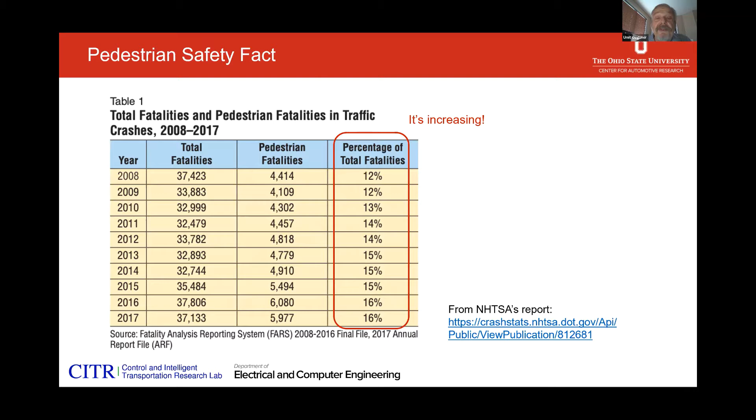I would like to classify a couple of different aspects of the pedestrian vehicle interaction. We're interested in pedestrian crowds and what we call shared spaces, where the vehicle can be moving within the crowd, presumably slowly, with different aspects of the problem there. And then we're interested, of course, in individual pedestrians crossing the street. There are some different issues that come up there, whether it's a straight road or whether we're turning a corner and there happens to be a pedestrian there, and so on.

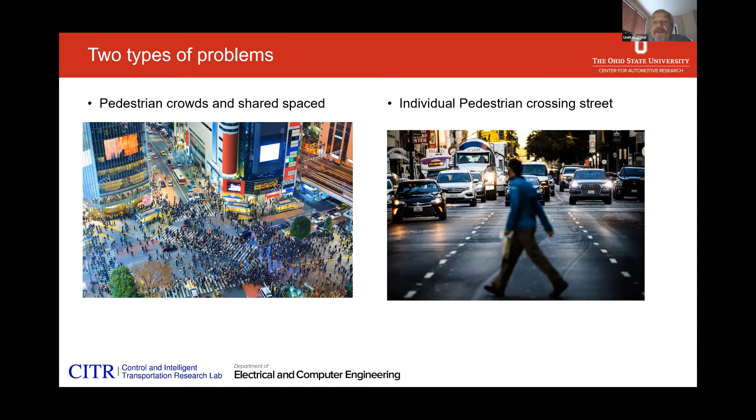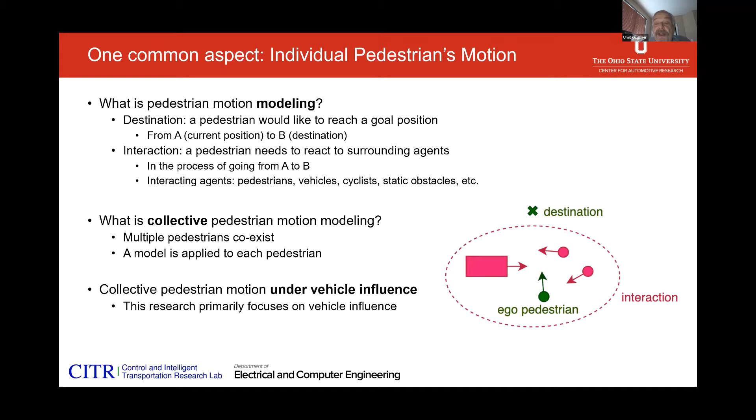In all of this, the common aspect is the individual pedestrian's motion. So we started off even before this UTC having an interest in motion modeling of pedestrians and groups of pedestrians. As you can see from that sketch, we have what we call the ego pedestrian, the one we're really interested in, and possibly other pedestrians also moving around that presumably you don't want to hit, some of whom may be moving with you, and then a vehicle, let's say a car, approaching you. If we are looking at a number of pedestrians, we have to think about the collective pedestrians with multiple pedestrians that coexist, where you have a model applied to each person, and then you also have to model the interactions. When you have a vehicle approaching this group, you have the vehicle influence, and then of course the pedestrians behave differently. So I'll spend some time looking at that specific problem.

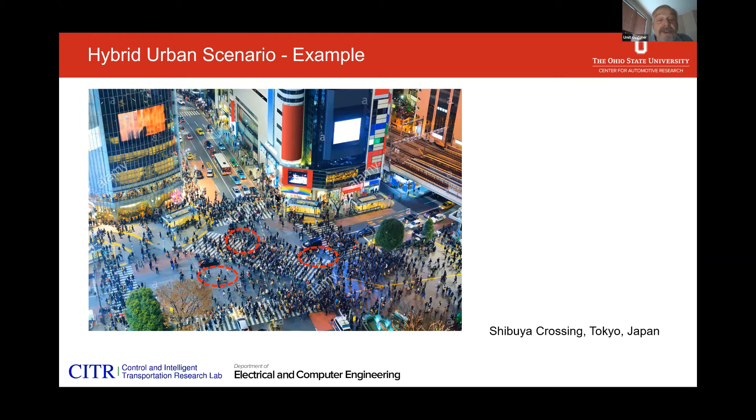I want to show right here where you see a few vehicles that are trying to move within this large crowd. This is somewhat of a different problem, although we're talking about a pedestrian that has somewhat similar, if not exactly the same, dynamic capabilities.

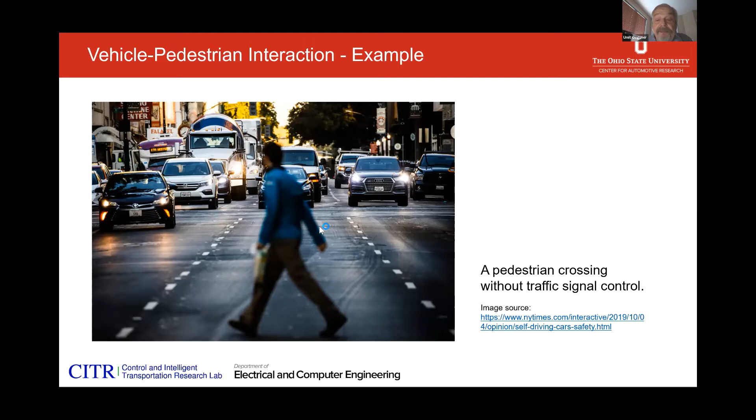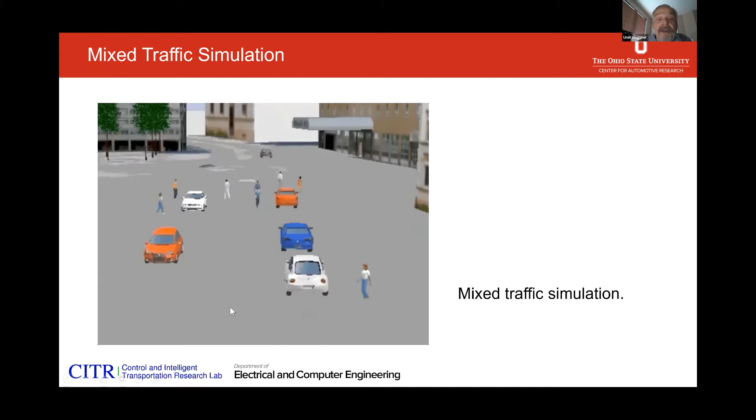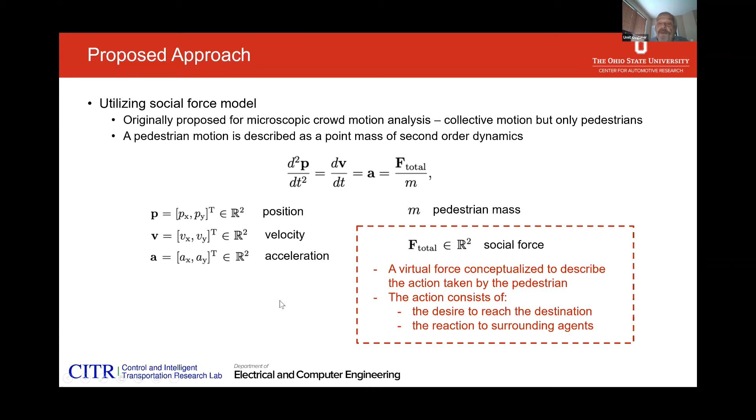There are a whole number of pictures we can bring up in looking at these, and even commercial domain simulation models have been produced, although I'm not sure whether all of this is backed up by real data. So we started getting interested in the mathematical model, and we picked up what's called the social force model, a point mass on the plane type of model, where you're interested in the position, velocity and acceleration of the individual pedestrian moving around. Then you have social forces, a virtual force conceptualized to describe the action taken by the pedestrian, consisting of a desire to reach the destination and a reaction to surrounding agents, which are other pedestrians and, in this case, maybe vehicles.

I'll skip over a lot of this, except to point out that yes, we can put together all the mathematics, but then you don't know whether it fits real pedestrian and crowd behavior in the real world. So we started looking at real data, some of which we generated and some others generated. We were instrumental in generating two data sets.

Due to time constraints I won't try to link to this, but I recommend you look at our two data sets: the CITR data set, directed pedestrians on our Ohio State University campus near our lab, and the DUT data set, done by a postdoc who worked with us and then went back to China, where he collected pedestrian data with vehicles going through them, which we've used a lot. You'll see pictures of it, and you can get to these data sets if you wish.

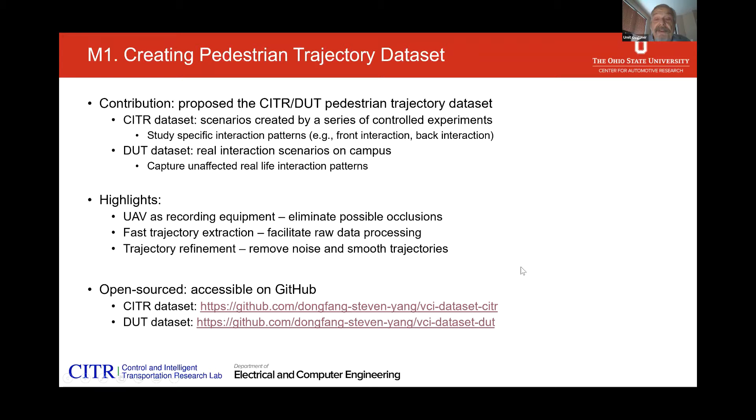So this is our experiment on the OSU campus, where we had a vehicle, an automated golf cart, that went through a number of pedestrian groups walking around and entered their domain.

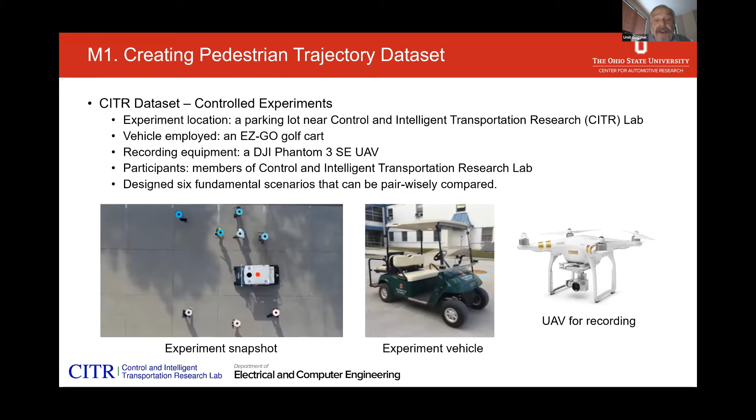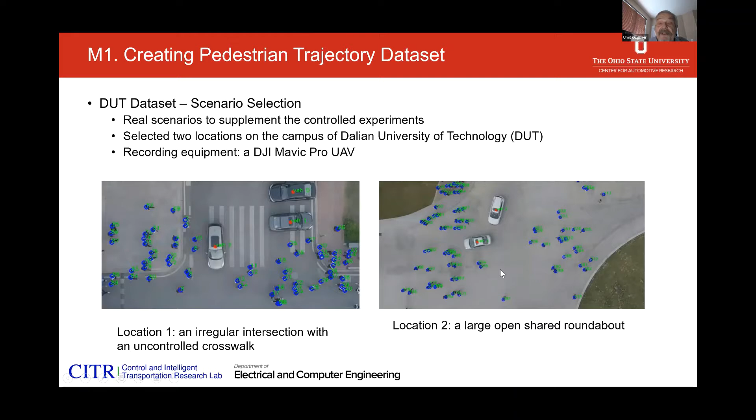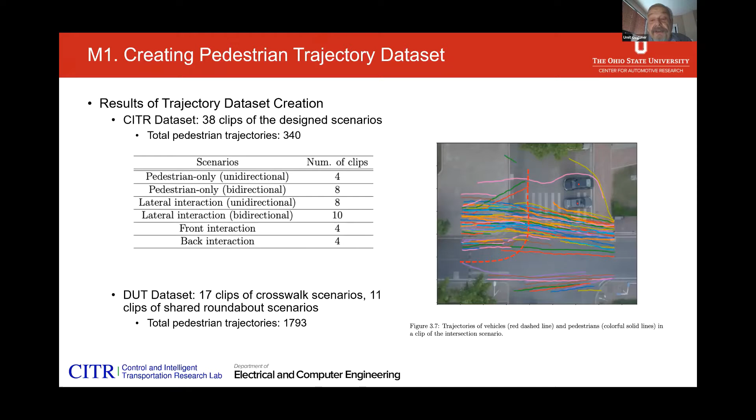And we have created trajectory data sets from what you've seen, and used those in verifying the equations, so that we can now claim that we can model things like this.

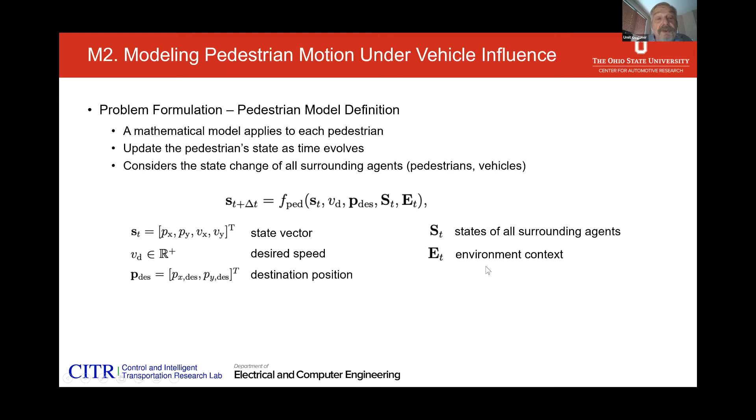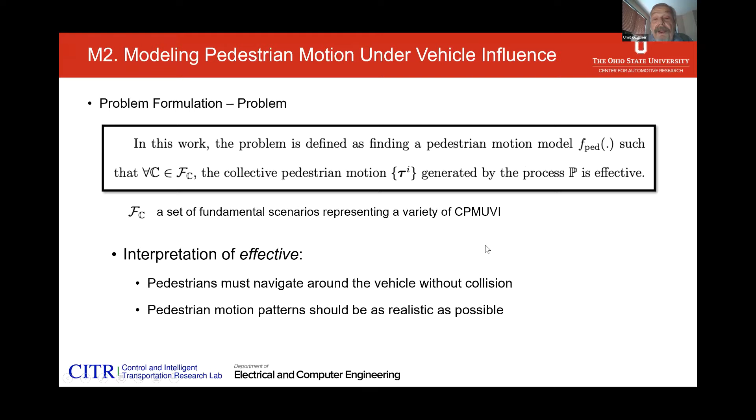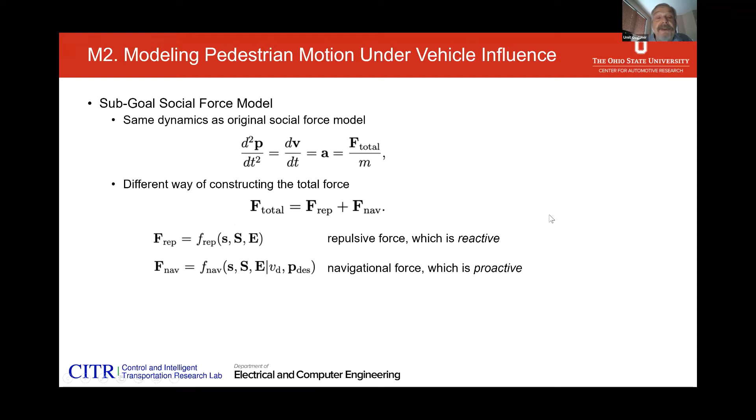I won't go that much into the models and various parameters. Rest assured these do exist and you can read them, the various forces we feel are there: a repulsive force, a navigational force which is proactive, and various effects of these pedestrians moving around. Let me get to the point I want to make, which is the effect of the vehicle.

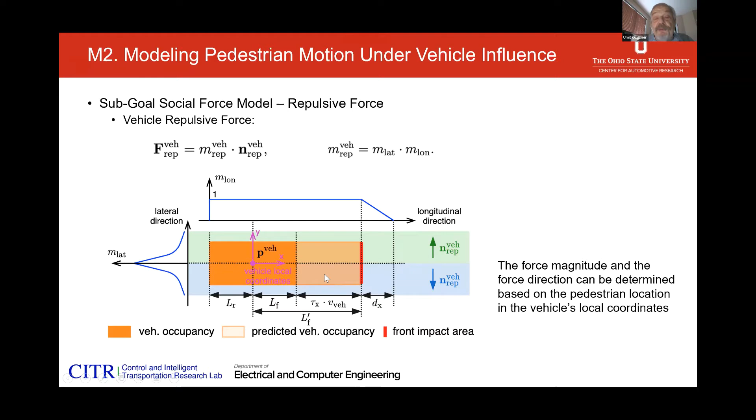We claim there is a repulsive force acting on each individual pedestrian due to an approaching vehicle. Here the approaching vehicle is what you see, the darkest, with its center of gravity marked. The vehicle is moving, and ahead of it is what we predict is a domain it will be occupying, and it has an effect all over the colored region, which gradually diminishes as you go further away. The effect is more in the direction of the perceived or true moving direction of the vehicle.

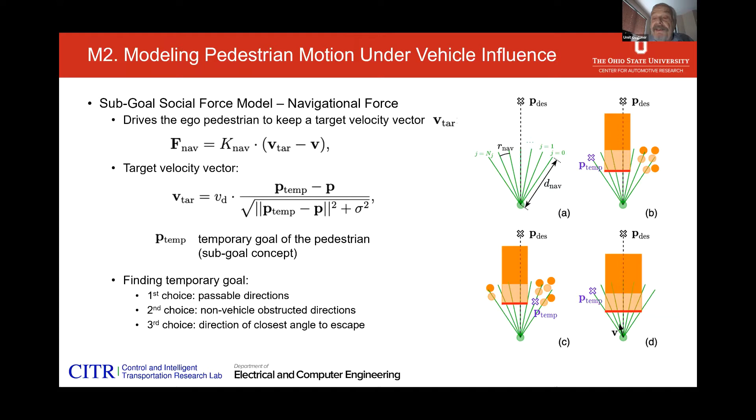So this acts as a virtual force on each individual pedestrian, and pedestrians can have various ways they want to move, and various ways the car is moving, so we see how it affects each pedestrian's motion.

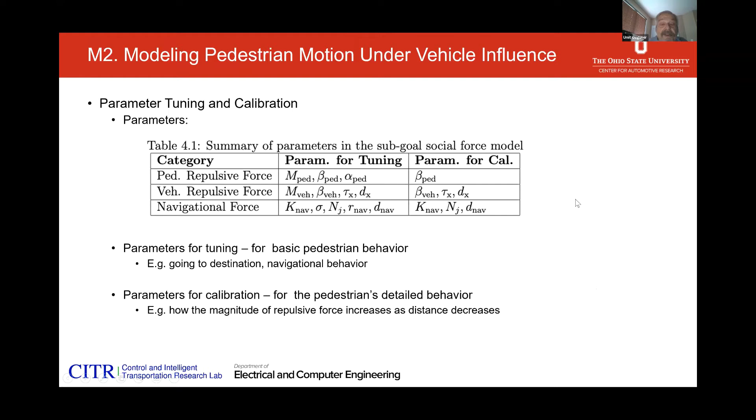We have set up various parameters in all our modeling and tried to verify them with all the data we could. So we have a data-based evaluation and baseline models covering all these various data sets we have generated here or in China, or obtained when available, for example from the Hamburg-Bergedorf Station data set.

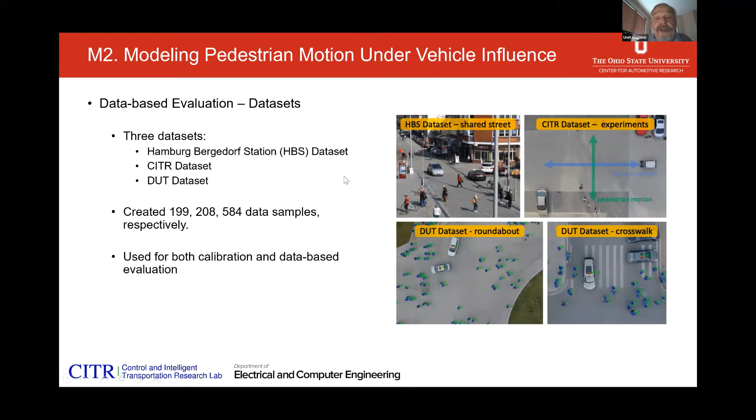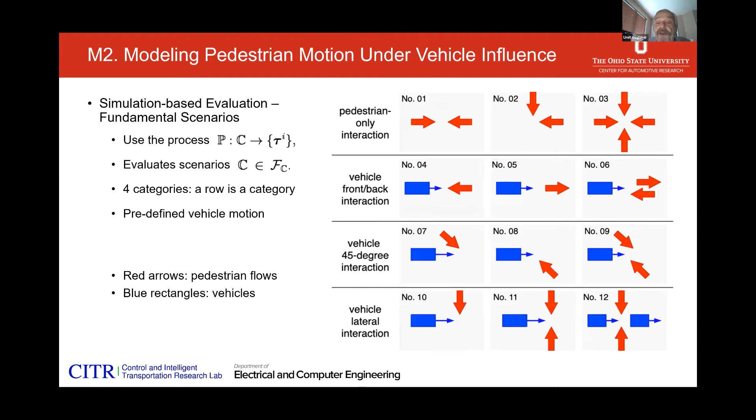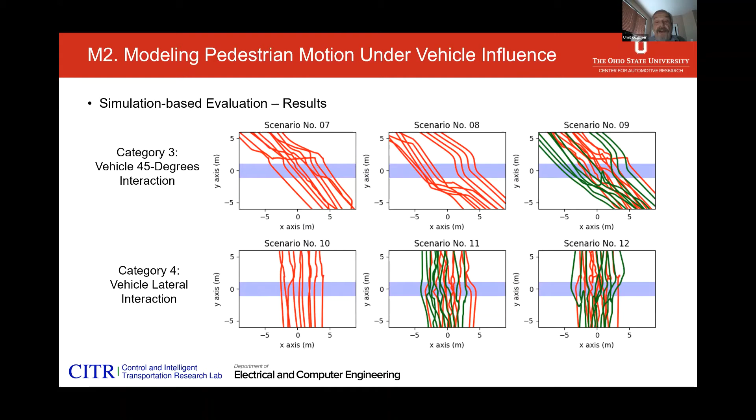We've identified a few basic motions of both the vehicle and the pedestrians moving, what direction each one is traveling with respect to each other, and classified them, generating a number of simulation-based scenarios to evaluate all these motions, seen there in colorful little charts and graphs. I'll try to show you some actual moving versions of these. These are all simulation-based results, but the parameters have been verified with real data.

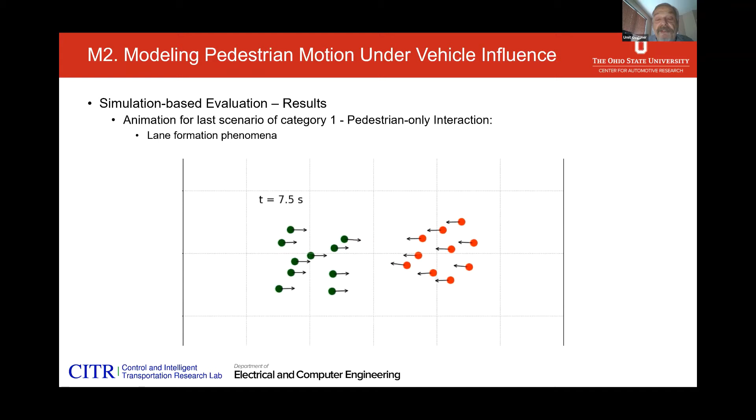We start off by looking at two groups of pedestrians, each going in a different direction, and they intermingle and try not to hit each other. There are certain groupings of a couple of people who want to stick close to each other, could be a parent and child, or just a group of friends, that sort of thing.

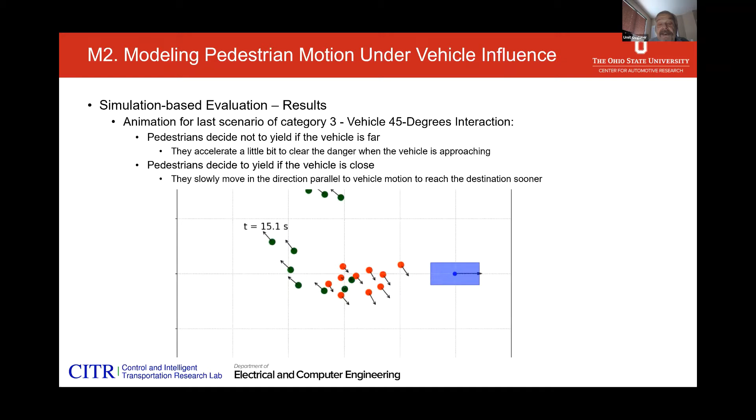So now let's throw a car into this where they all converge at a certain point. Due to the model we developed, we can see the car's emergence affects all the motions, but overall the green guys want to go somewhere, the red guys want to go somewhere else, and they interact and make space for the car.

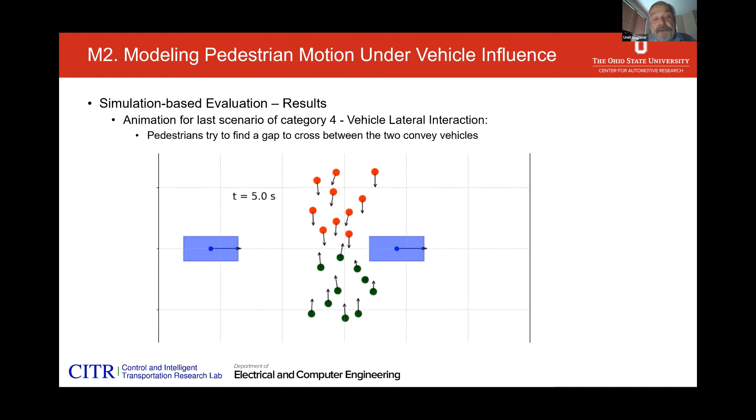You can try different scenarios with multiple cars maybe, and the human beings do try to accommodate the cars.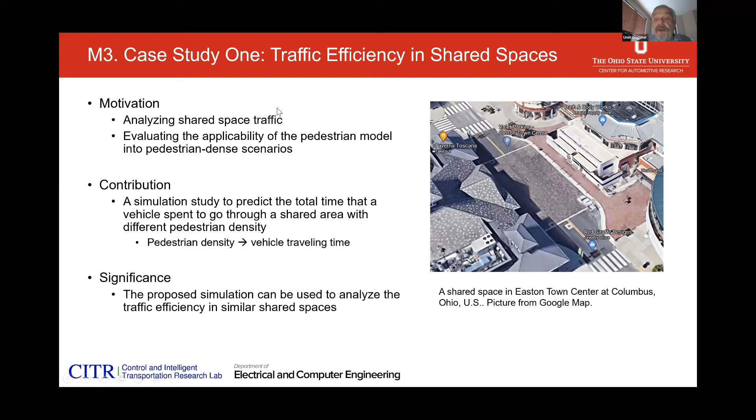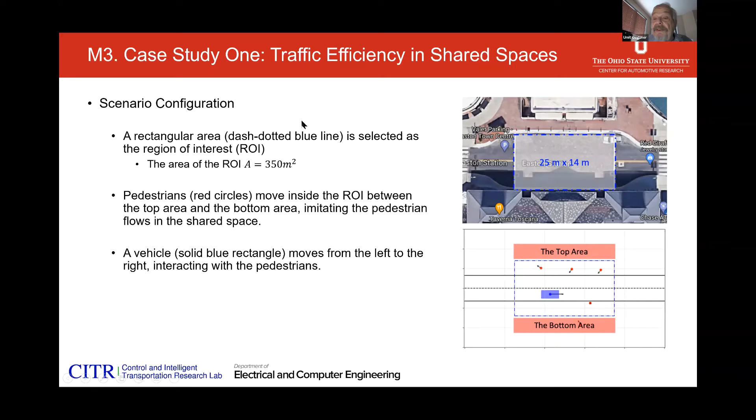I'll try to go through this fairly quickly, just pointing out that we tried to collect more data and look at how all of these would behave in real situations, also here in town in Columbus. So we looked at specific locations in the city of Columbus and checked how these would apply as far as estimating how these would move.

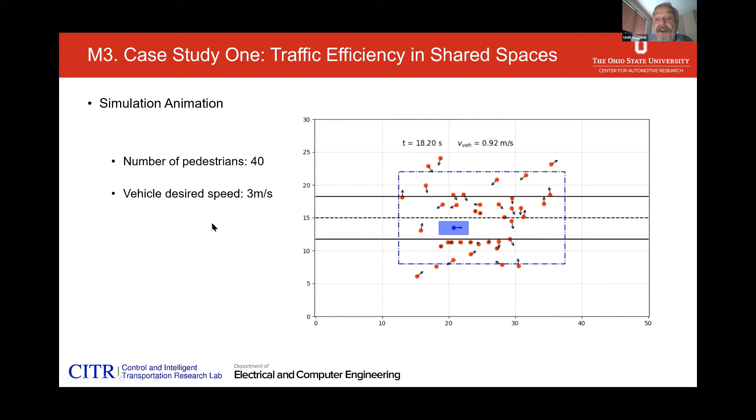As you can see here, this is getting to be much more complex pedestrian groups in the shopping mall area, where we anticipate these automated vehicles may be moving in spite of all the pedestrians. This is a simulation with about 40 pedestrians, and you can keep on adding pedestrians and cars that move among them.

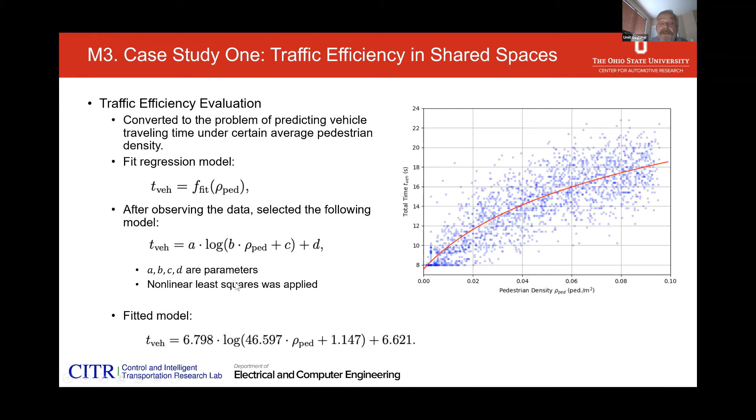So you can create traffic efficiency analysis by looking at all the data generated, and try to see the effect of these cars and pedestrians on the traffic that wants to go through the pedestrians, and do various other studies related to traffic where you have common spaces that both human beings and vehicles have to use at the same time.

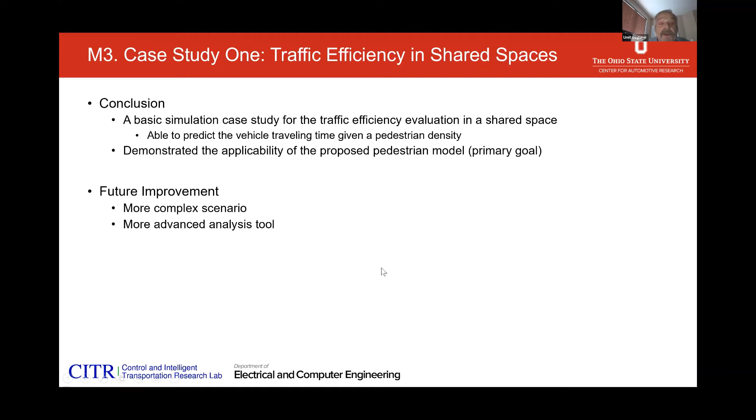So we've done a basic simulation model, created a model, but we're getting into more and more complex scenarios and trying to use this as an analysis tool.

Okay, so in the remaining time, which is not too much, I'd like to look at a different problem. Once you have the pedestrian model, you can get into a whole bunch of other issues too. So let's leave the crowd problem aside and simply look at a pedestrian trying to cross the street, using the same sort of models we generated.

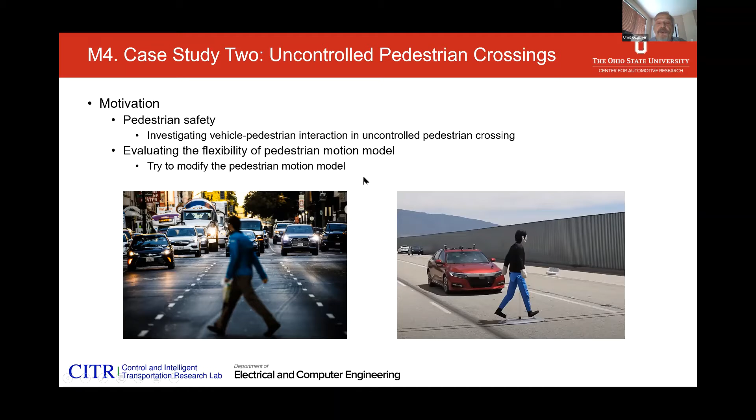Since you've seen almost six different students working on these types of things, we've covered a lot of different types of problems, settings, and scenarios that you may be interested in. I'm just going to talk about a couple of them. We've looked at various other scenarios and situations, but one very simple case is just one pedestrian trying to cross the street and a car approaching.

Now, so far we have assumed in what I presented that the car itself does not do much decision making. It's slowly driving through a crowd or crossing paths with a single pedestrian, and it just keeps on moving, and we try to see what the pedestrians might be doing.

Now we'll try to look at it from the other viewpoint, from the viewpoint of the car, and let's start with how the car is going to possibly make a decision about slowing down and making a decision about stopping to let the pedestrian live, basically.

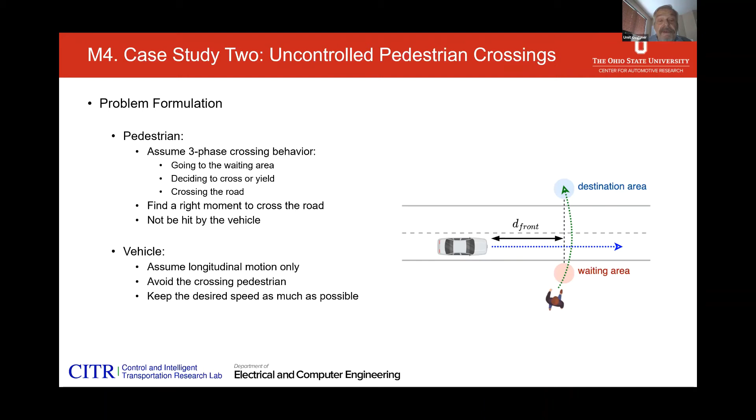So again, we can go through lots of different types of modeling, and there are decisions being made, observations made from the vehicle side, and observations made by the pedestrian side. As the pedestrian moves forward in a setup like the one I just showed, the pedestrian will do gap estimation, use his social force interaction model, and then it will affect the pedestrian dynamic model.

And the vehicle will have a pedestrian motion predictor and has its longitudinal speed control and the vehicle dynamics. So the pedestrian dynamics affect the perception of the pedestrian motion in the vehicle, and the vehicle dynamics affects the pedestrian's gap estimation as it tries to cross the street.

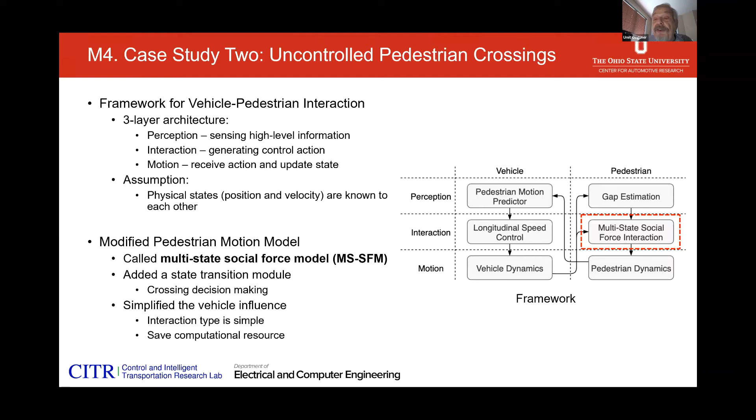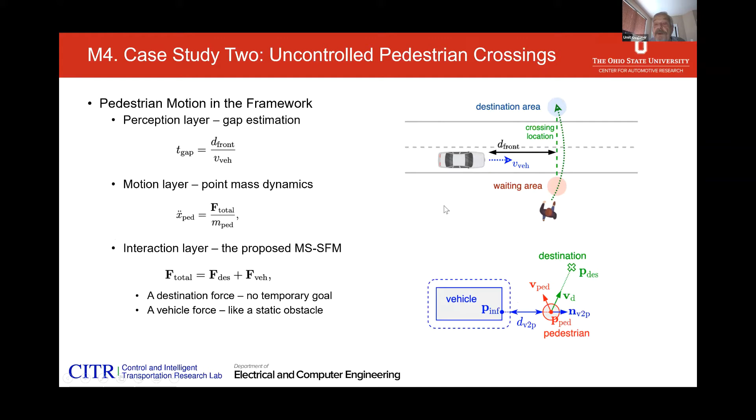So this is the type of framework that we have established and worked on with different scenarios. Again, I won't go too much into detail. We'd be happy to answer questions, or you can get in touch with me after the presentation.

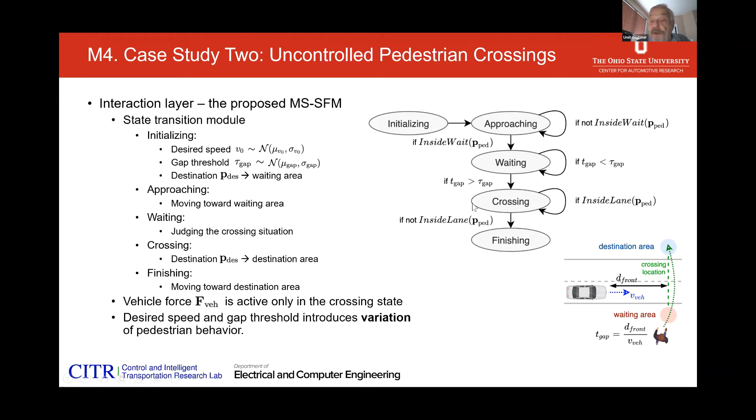But again, as you may guess, there are various decisions being made looking at various thresholds. Okay, getting close to wrapping up, so I'll skip over those slides.

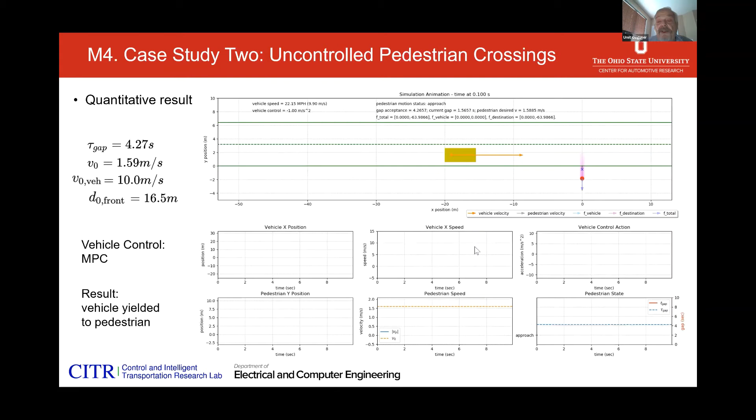Again, now you can have a more detailed version of the car's behavior as the pedestrian crosses the street. You can see the car maybe slowing down, maybe stopping, or not, and hopefully the pedestrian can decide whether it should be moving, and hopefully this won't occur. I'll quickly go over another student's work just to give you a taste of what other problems may arise.

If you have a situation like the one on the left where there are trees on both sides of the road, there could be pedestrians hiding behind the trees that are occluded. Or on a street where you have parked cars like this with pedestrians possibly thinking about crossing, they would be occluded from the vehicle's viewpoint because of all these parked cars.

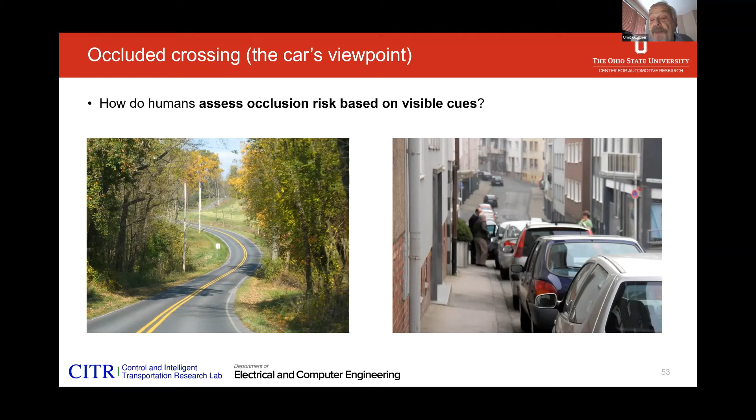So there is an occlusion risk, and the car itself or the driver has to decide what the probability is that a pedestrian may emerge behind the car. We have looked extensively at parked cars by the side of the road behind which pedestrians may be emerging, and investigated what the probability distribution of one or more pedestrians emerging behind these cars are, depending on multiple cars being there.

Of course, in a situation like this, there may be other information about what is further behind as a source of pedestrians coming. Is there a sports field that people were watching the game? Is there maybe a high school and this is the doors opening at the end of the school day? So there may be background effects that can give you more cues about the possibility of emergent pedestrians. We are interested in evaluating those types of cues, possibly in an intelligent AI type of setting, and maybe even learning about these things.

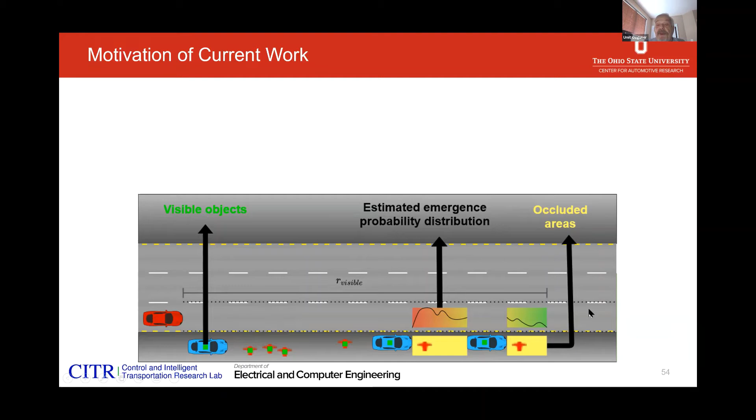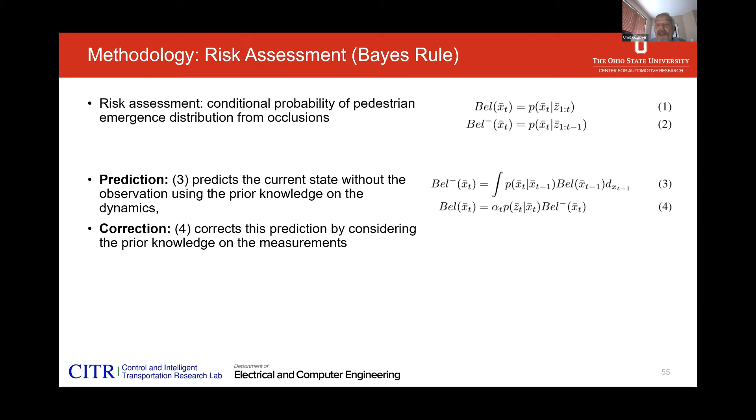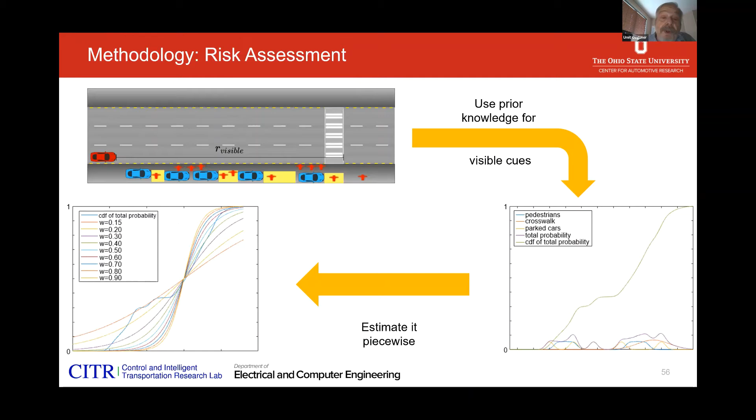But the point is, there is going to be a certain probability distribution along this roadway of emergent pedestrians, and we can certainly base our decisions on that. So you can do a risk assessment, depending on what your assumed pedestrian emergence probability distributions could be, and make your speed determination for the car based on knowledge that somebody could be jumping out from behind the car, or maybe you just see the pedestrian there anyway with cues.

For lack of time, I won't go too much into detail, just trying to give a taste of the different types of problems one can try to model, understand, and act on, especially if you are thinking about an automated car driving along a roadway with parked cars and the possibility of occluded pedestrians jumping out from behind those cars. You can decide whether you need to yield, decelerate very rapidly, or do a cautious drive along the road, and decide on that beforehand.

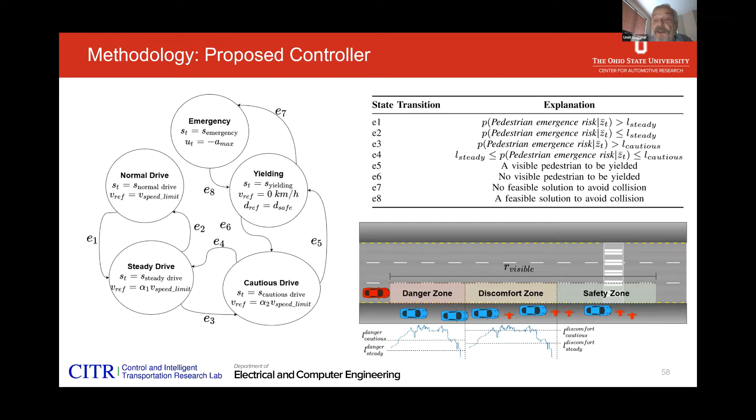Okay, so we have established some baselines. Let me see if I have any simulation I can show you. Here's a simulation of various possibilities of emergent pedestrians, and here's the possibility of a crash occurring. Okay, let's go to another slide.

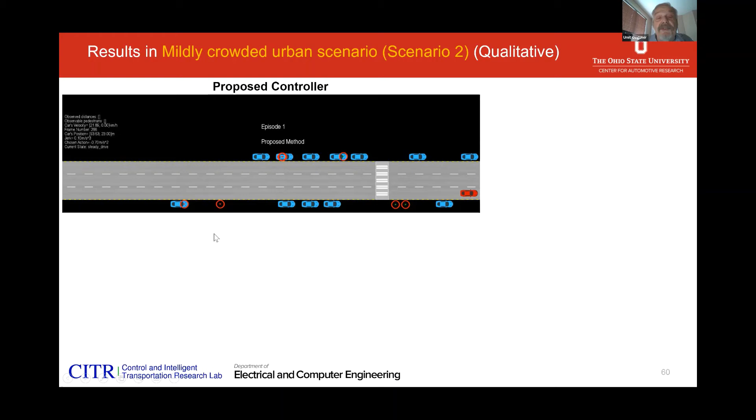Here's a case where the car really slows down because it sees the pedestrian out in the open. And here is just a cautious drive. Obviously, there is a pedestrian crossing there where the probability of a pedestrian crossing the street is higher, but that doesn't mean there may not be pedestrians jumping out behind these cars onto the roadway.

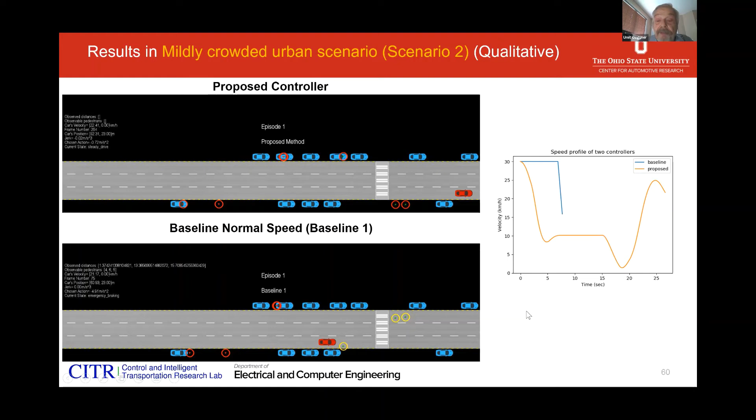Various other cases have been studied. Let's start that - going across, and what we're looking at is different cases where different types of driver behavior can affect the outcome, i.e., whether there is going to be a crash or not.

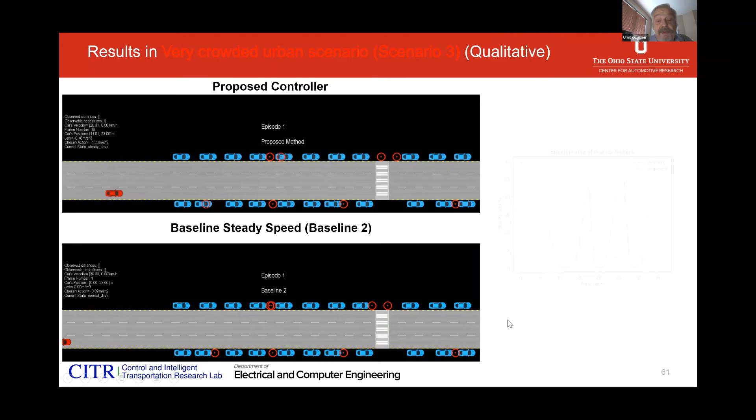So I won't go into many more, just as I said, to give you a taste of what has happened. Okay, let's see.

So in the end, you can decide on whether you want an automated car - how much risk would it take? You could decide it has to be very cautious, but of course, that'll take a long time. If you wish it to never do emergency braking, then it will take a long time to travel along that roadway with multiple parked cars.

Or if you want to allow it to do somewhat of a jerky motion - not entirely jerky, but slowing down, speeding up again, etc. - then you may take less time to cross that, depending on the probability of looking at different cues.

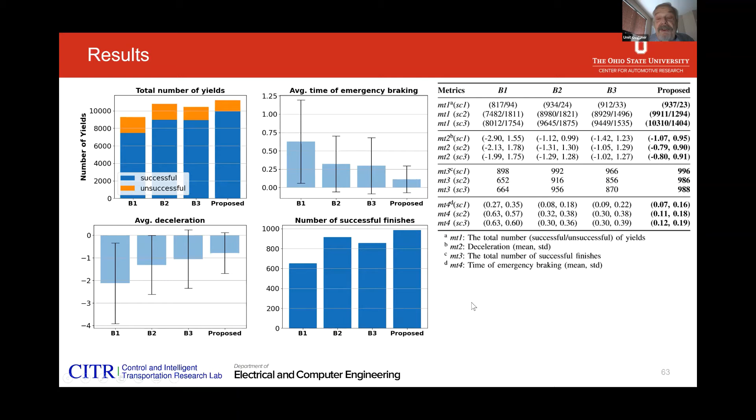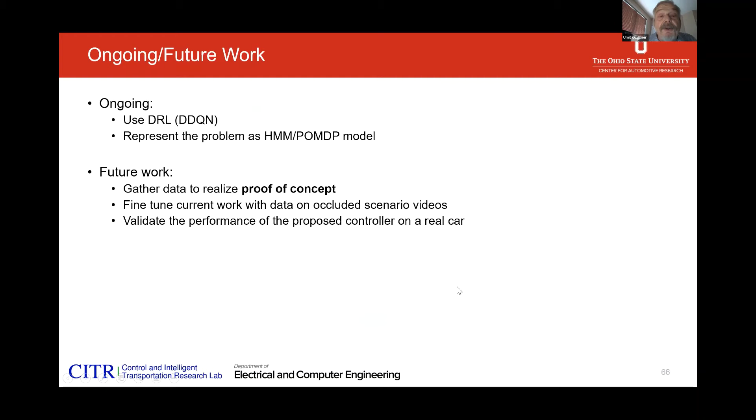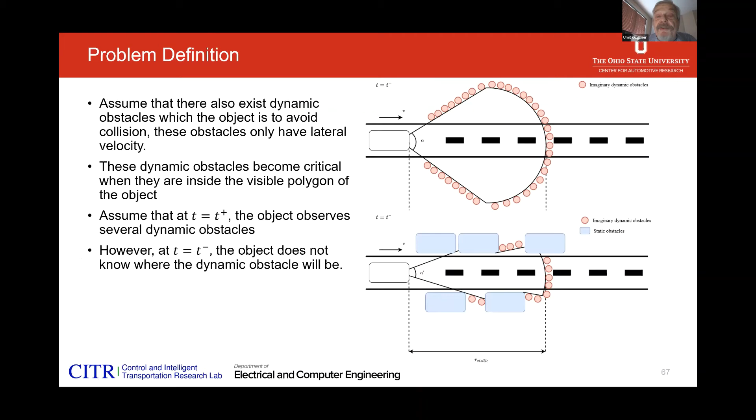We have proposed an algorithm that looks at occluded, unseen pedestrians in these scenarios. We are continuing work on this aspect, looking at different types of sensors and their effects. As I keep saying, I'm just trying to give a taste of the different types of issues. Just a couple of minutes - we are also doing a lot of work on intersections with vehicles turning.

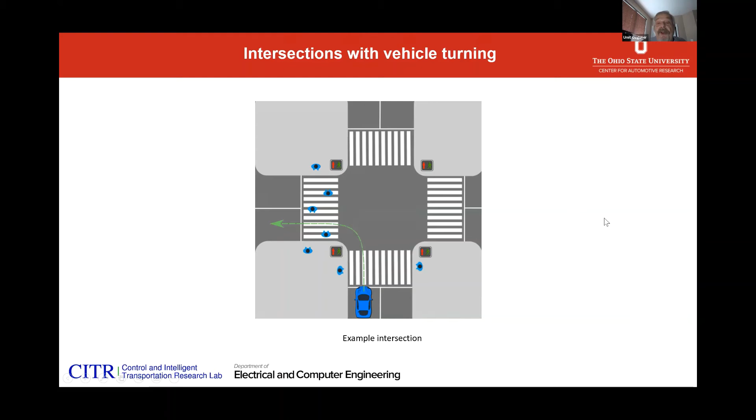Don't mind the fact that the vehicle is on the left lane. This is a study related to data from Japan, where you're turning from the left lane into the left lane, and you're interested in whether there's a possibility of hitting a pedestrian that's just around the curve. So we've done a number of studies in these sorts of things, and also looked at the possibility of new technologies like having sensors looking at possible pedestrians crossing the street.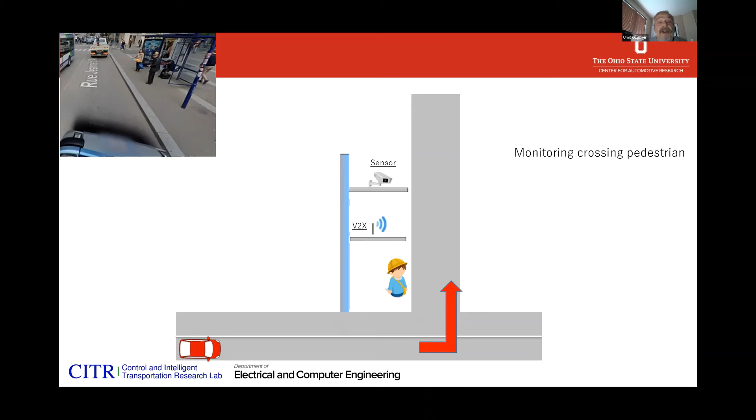Obviously this is a nice clean figure. In real life, take a look at the photograph here, where the occluded pedestrian can be right behind this bus stop, and it could be right behind this bus on the left. Either one could be just running out in front of us. So there is a ways to go between a clean, modelable setup and a real life situation. We understand that, but we're trying to understand and establish what the basics are and what we should be looking for in designing automated driving systems.

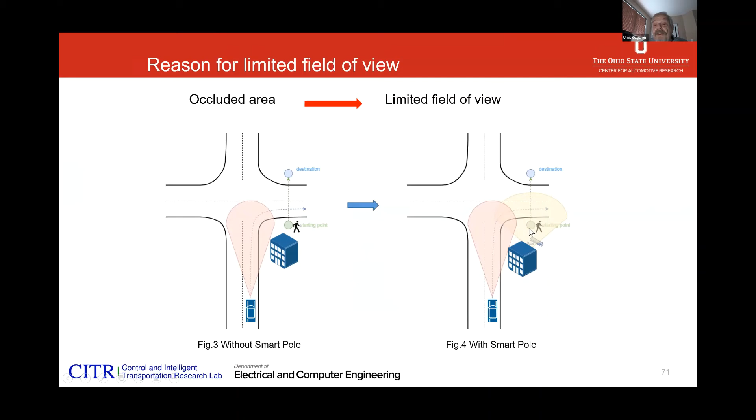Again, a lot of investigations in the following type of scenario where our sensor may or may not be able to see, and at some point we'll see, if we're going to make a turn, it will see this pedestrian at some point. Whereas if there is a V2V connection or a V2X connection, we can learn about the pedestrian that is crossing. You can build models that include the speed of the pedestrian, communication range, detection range, and things like that.

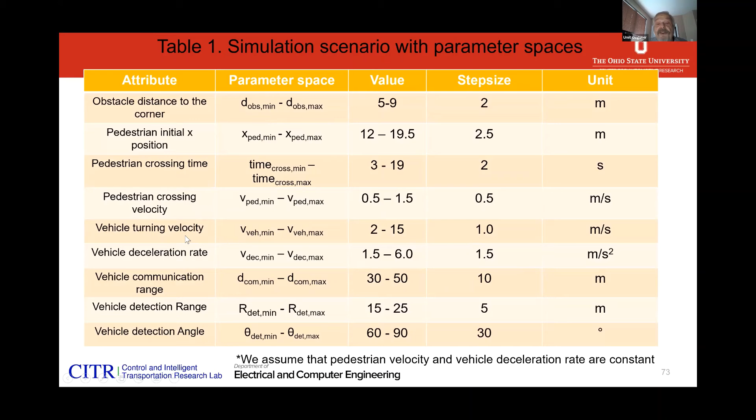Let me just show one simulation of a car coming and hitting the poor pedestrian.

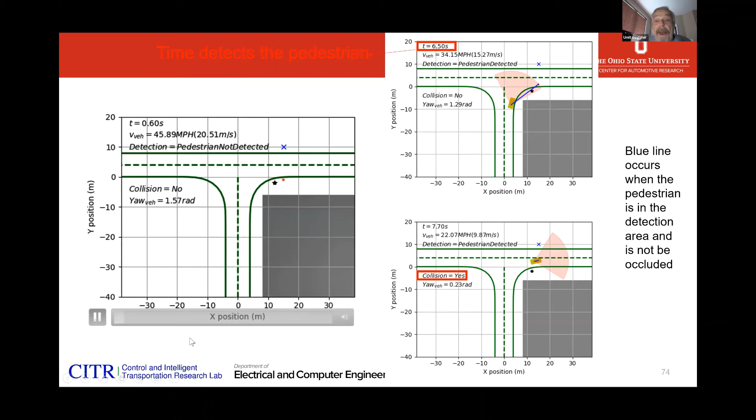At some point, we have to stop, but I think I covered a whole bunch of situations. All I can say at the end is there's much more work to be done, especially once you get into designing automated cars that may be either slowly moving among crowds or just having to deal with occluded but emergent pedestrians for which we have to slow down and stop. So much more work to be done, but it has been interesting work.